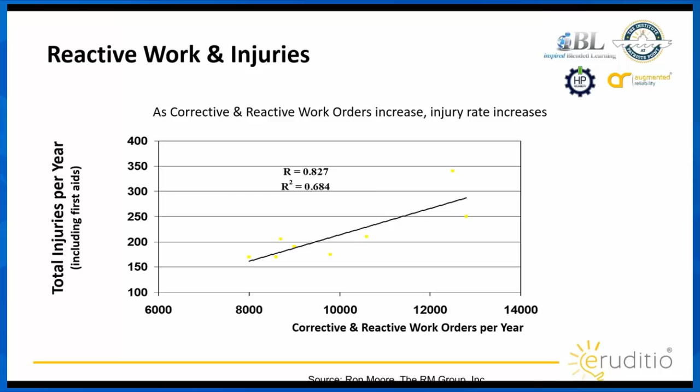Continuing on, what we know is that as we increase our PM and PDM work orders, our injury rate decreases, inversely related to the other one. As our PMs and PDM work is defined, we generally have very good job plans that call out specific risks and hazards, how we mitigate those, what permits we need, and reference lockout tagout procedures. So obviously the more proactive we are, the safer we're going to be. In order to be proactive, we have to be planning jobs, and planning them to the right level of detail.

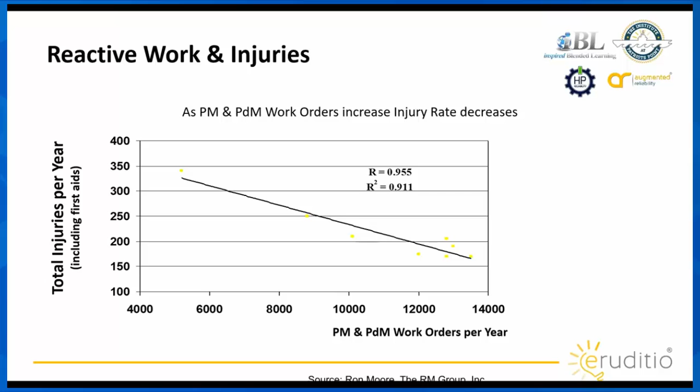Now I asked about reliability, what is reliability to you? You guys gave some good one-word definitions: consistency, quality, repeatability, teamwork, safety, all those great things.

But if you look it up, the definitions are: the quality of being trustworthy or performing consistently well, and the degree to which a result of a measurement, calculation, or specification can be depended on to be accurate. I really want you to think about that second definition. From a PM, corrective, or rebuild perspective, do your work orders and job plans allow your mechanics, electricians, or technicians to take a measurement repeatably and consistently, so that if mechanic 1 takes a measurement, and mechanic 2 takes that same measurement 5 minutes later, will they get the same results?

That's what we need from a PM perspective. We also need that same level of rigor in corrective and rebuild procedures. But how do we do that if we don't have good job plans? It's really going to be a struggle.

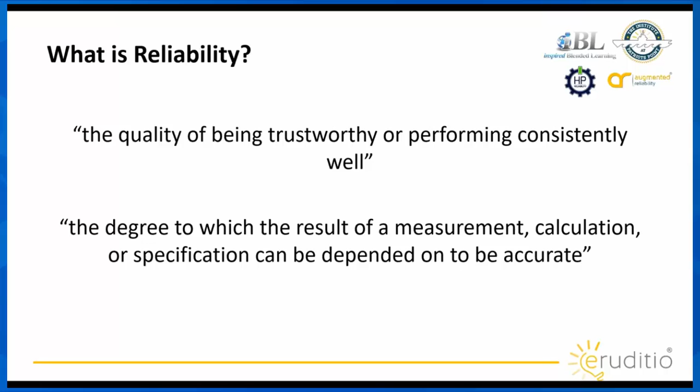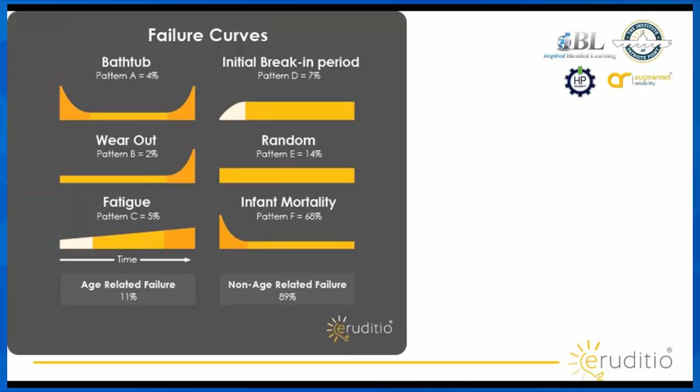Then we also have other issues with reliability. Most of you recognize these failure curves from the Nowlan and Heap study, taught in RCM and other learning activities. What it essentially shows is that most of our failures are not related to age, they're in fact related to infant mortality. Now what does this have to do with job plans? We know those causes of infant mortality come from a variety of places: design defects, manufacturing defects. Some of that's out of our control, we can't directly influence that when developing job plans.

But those next ones we can influence: installation defects. How many of you have defined specifications for installing equipment? When you're aligning rotating equipment, are you checking for soft foot first, then doing your alignment? Are you taking into account thermal growth? Oftentimes thermal growth isn't considered, and that's an installation defect, because as that equipment heats up, it's going to grow out of alignment tolerance, causing premature failures. What about commissioning?

Do we have a proper commissioning procedure built into our job plans, or a proper way to hand it over to operations or shut it down? Those types of things influence that as well.

We have improper routine maintenance. Once again, that's about consistency in performing an activity or taking a measurement. Lubrication, for example. How consistent are we at applying the right level of lubrication? Do we have the specifications so we know what lube levels we need to apply, or are we relying on pumping 3 shots of grease into that bearing? No, that's not very specific or consistent.

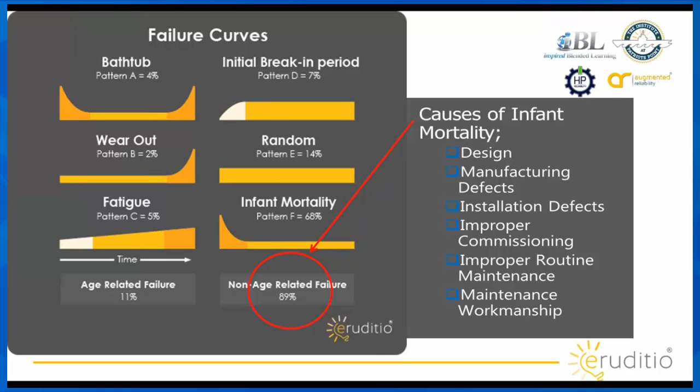And then we've got workmanship. I'm not saying that we don't have capable people. There are other pieces that come from workmanship, and we're going to talk about those next. We have human performance factors that influence us. There's a lot of issues potentially going on that cause some of those workmanship issues.

A lot of this can be addressed with good job plans. But first, before we dive into that, I want to make sure we understand what these types of errors are.

The first one is really an unintended mistake. What that means is slips can be thought of as actions not carrying out as intended or planned. A great example is when you fat finger something - you meant to type 9, but you typed 8 instead. That's a slip. Job plans can help minimize some of those.

Lapses - and I'm sure many of you have experienced some of these. How many of you have driven to work or driven home from work and not remembered that drive? That's because our mind works on autopilot sometimes, and lapses are those exact things. We skip certain steps, we miss certain actions because our mind is on autopilot. Job plans and a checklist combined with that can eliminate lapses as well.

Then we have an intended error, or a mistake. That is a misapplication of a good rule, or application of a bad rule. Once again, that's something we can help mitigate and manage through various techniques, but having good job plans will help minimize those as well. And then lastly, we have violations.

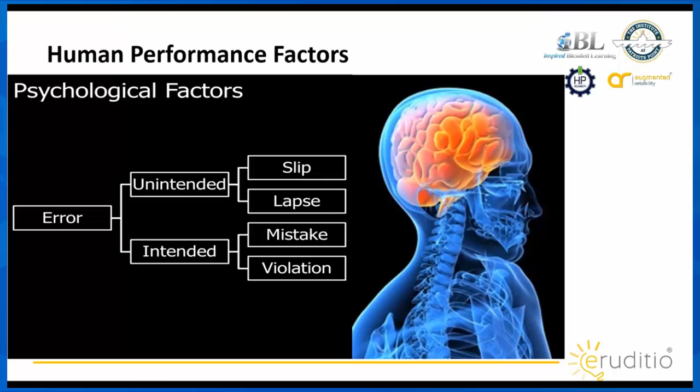If we go back to those failure curves, 68% infant mortality - we're leaving a lot on the table. Procedures and job plans are one of the ways to tackle those activities.

And how much does this give us? What's the benefit? If we have a written procedure available - a good, detailed, step-by-step job plan like we're going to learn about next - we'll get about a 5% error rate typically.

Now if we combine that with a paper checklist, we can get that down to about a 1% error rate. And if you use digital checklists built into the system that will not allow you to continue unless you do so, we can get that down even further.

But even having just a written procedure, a 5% error rate, is a dramatic reduction in infant mortality based on what I see personally in most organizations. Adding a paper checklist to that is hugely, hugely beneficial.

Now, those of you who haven't already - the Checklist Manifesto, it's a great book. I highly encourage you to grab that and read it. It talks about human error, the role of checklists in eliminating human error, and a variety of great things around that. It's actually changed some of the way I think about planning now. It's definitely worth picking up and going through.

So how do we actually develop these job plans? What can we do to develop good job plans that allow us consistency, repeatability in our work, and allow us to capture knowledge, and all those great things? Well, there's a way to do that, and it's called job mapping.

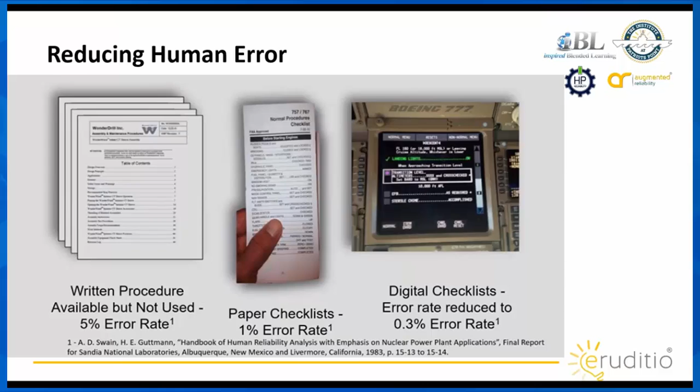The way job mapping works is we're going to break down not only projects but jobs into smaller and smaller buckets. So at the very beginning, let's talk about a project. We might have a winter shutdown or a summer shutdown, where we're going to do a bunch of maintenance work. Now within that project, we're going to have a whole bunch of different jobs.

We're doing this so we can bucket our work and dive deeper into the individual steps needed to perform that task. From there, we go down to the steps, and each one of those tasks is going to be broken down into 4 to 7 steps. Now if we start exceeding that, say 10, 20, 30 steps, we might need to look at breaking that up into a few more tasks as opposed to one larger task.

But these are the very specific activities that we're going to do. Set new pump. If we're removing the old pump, it might be attach rigging, then lifting, and so on and so forth. We're going to get very, very prescriptive in what we're doing here. Then we have one more step down, which is the instructions, and these are specific to each step, and we'll dive into these in a minute.

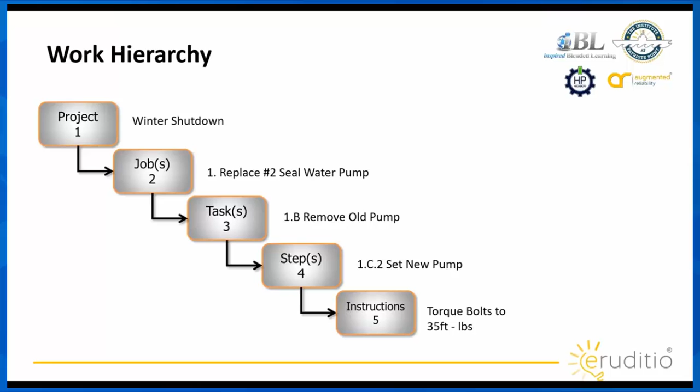One of the things we also have to be aware of as we start to map these out—we have our steps here: break coupling, rig to lift, pick up old pump, that sort of thing—is that there are certain things we need to be aware of and communicate out to our maintenance technicians, especially from a safety standpoint.

And those are warnings and cautions. Now I have to ask—I'm sure all of you are very diligent and have always read the manual that comes with your power tools. If you have, you'd know the difference between a warning and a caution. A warning is really related to personal injury: what can go wrong that can injure the user or someone in the area? Whereas a caution is more about damaging equipment.

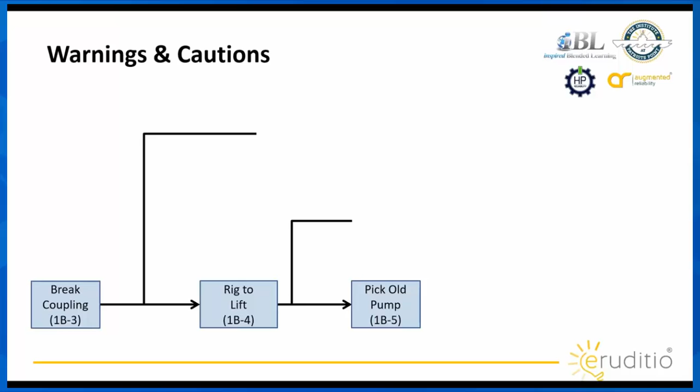So when we're building this job map, we need to create awareness around both warnings and cautions. What this may look like is we might put a caution before the step. You see, we're going to rig that equipment to lift, so we'll put a caution in there: next step contains rigging, failure to follow all company standards and rigging procedures could result in equipment damage.

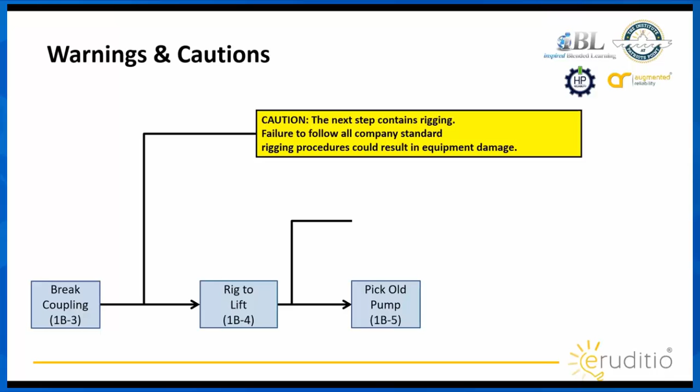Now, next step is pick up that pump. That's where we could have an injury. So before that, we're going to map that warning. The next step contains lifting. Failure to follow those lifting procedures could result in severe personnel injury.

We want to map the warnings and cautions before the step takes place. Reason we do that, we want to create awareness of those before the person executes that step. That's why we map them before. We also color code them. Cautions yellow, warnings red. Creates a visual reminder of, hey, there's a risk of injury here, or there's a risk of equipment damage. So we want to call these out. And these are part of the instructions for each and every step.

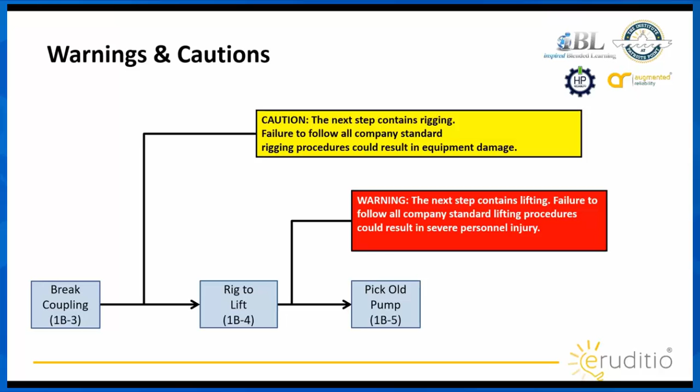Next, we're going to move on to constraints and resources. Now, constraints really is what is going to inhibit us from completing this step. Right? Now, this can go a variety of different ways. What's the weight of the pump? Where is the pump located? Do we have access issues? And so on and so forth. While resources are things that we need to do to overcome those constraints. So we always map constraints and impediments to the top of the step. Then we map resources to the bottom of the step.

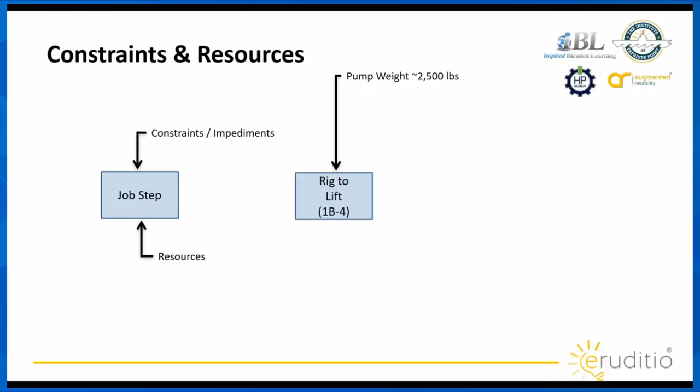So what does this actually look like for us? Well, rig to lift is our step. A constraint is the weight of that pump. It's 2,500 pounds. I definitely can't pick that up, and I'm sure many of you can't either. So what are the resources we need to overcome this? Well, we might need some cables, some clevises. We may need our rigging standard or procedure so we know how we should properly rig this or what the requirements are for us as an organization.

And then if we have to pick up this pump, what are the constraints? Well, it's 50 feet off the ground and it's 75 feet from the closest parking spot. That's a major challenge for us to overcome. So how are we going to do that? We need a 30-ton crane with 100 feet of stick, and we have a lifting procedure again. So here, what we're doing is we're really identifying what are all the issues that we're going to have to overcome while we're doing this work, and what are we going to do to overcome those. This allows the planner to really develop or define the tools, the parts, the equipment, the stuff we need to perform those tasks and steps.

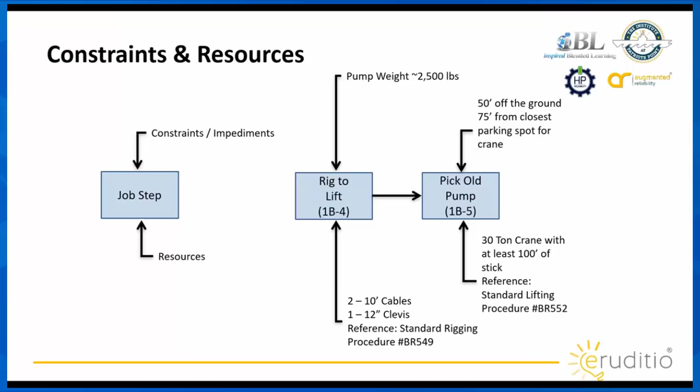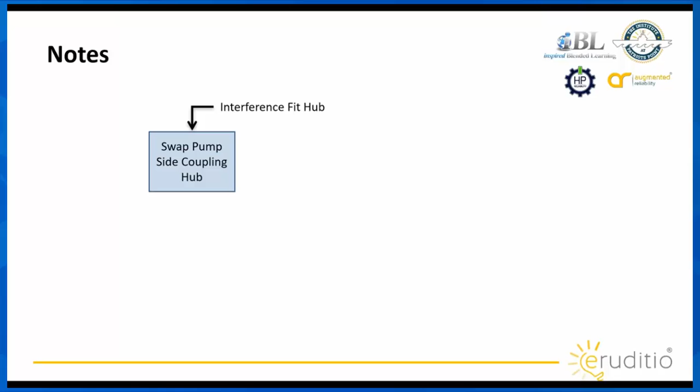Now from there, we get some other notes. All right, so here we got to swap the side coupling hub. It's an interference fit. That's good to know. That's going to dictate what tools we may need to provide our technicians with to go do this job. So in this example, we might need a hub puller. We might need a torch. We might reference some inspection procedures that we have. That way, everyone's doing it consistently.

Now, we may also have some other information we need to pass along. And if we really need someone to take a measurement, make a judgment step, we want to highlight that in gray underneath the step. In this example, if those hub teeth are excessively worn, then we want them to replace it, and we are going to provide that part number. Now, I wouldn't suggest we go ahead and kit that part, but we're going to put it as a reference because they may need it.

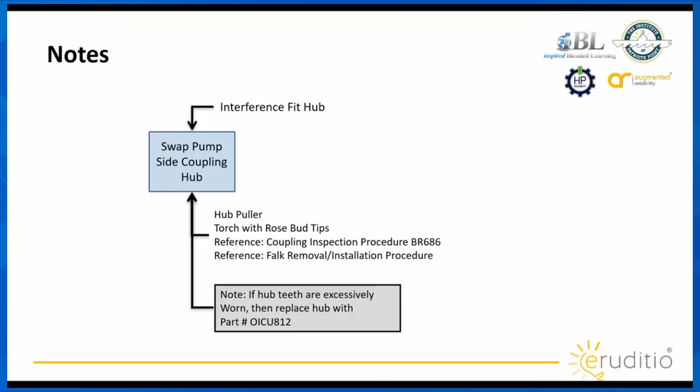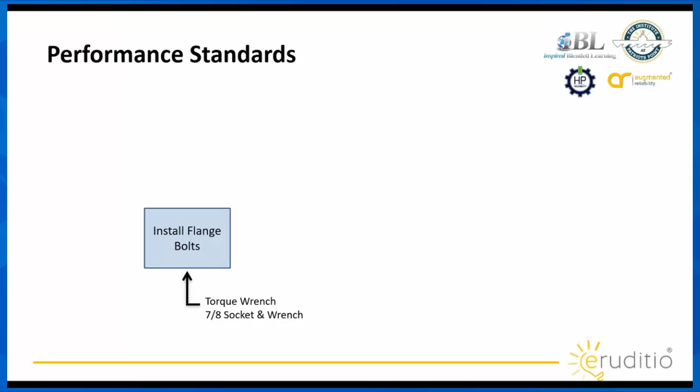We also have performance standards that we need to hit. Now, we talked about repeatability and taking measurement or consistency in the execution of work. Well, how do we get consistency if we don't have performance standards built into our job plans? All right. So that's something we definitely need to call out. So for this example, if we're going to install flange bolts, you see we got our resources there. We got a torque wrench, the socket size, that sort of thing. There's special instructions, so there's a special torque pattern that we need to follow, but then we also need our specifications there. All right. So that 85 foot-pounds.

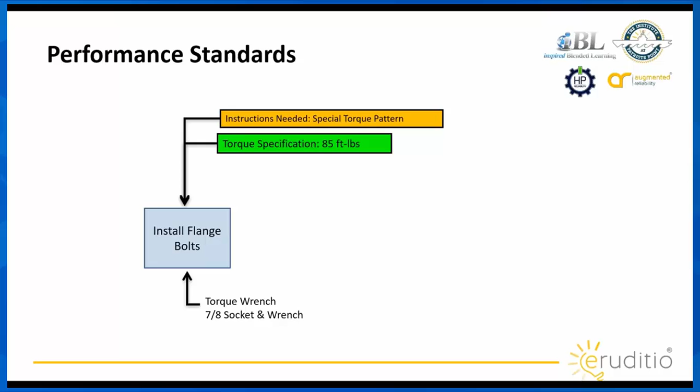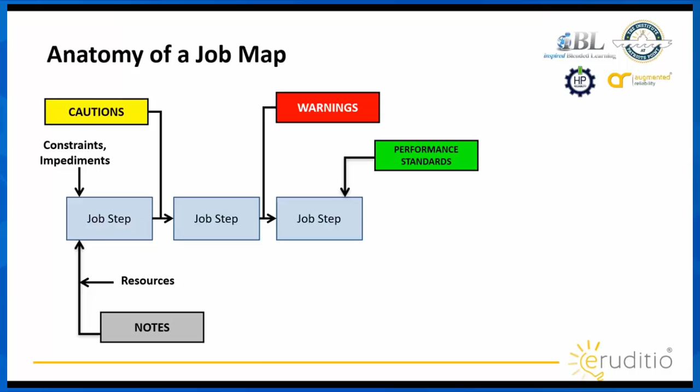Now I suggest we take specifications a little bit further using a 3T approach, and I'll talk about that in a moment. All right. But we need to call out the special instructions or specifications that we need to perform that task. Now, if we map all that out, this is what a job map may look like. We're going to have warnings, cautions, constraints and impediments, performance standards, notes, resources, and a variety of things. All right. This is going to get big, and this may get not so pretty. Here's an example of the larger activity for replacing that pump. All right. So this is what the maintenance planner is doing with sticky notes on a whiteboard or potentially a desk.

You don't have to make it look pretty like this on the screen. I created a nice pretty one here for an example. Usually this is sticky notes. You take a picture of it and you use that. This job mapping activity is really for the planner to organize and think through the job from beginning to end. It's really about making sure we don't leave any stones unturned.

We identify all the critical things to make sure this job is successful, not just from a safety standpoint, but also from a reliability standpoint. Now, some of you may be looking at this and you may be thinking, you know what, that's a lot of detail. I don't know if I need that level of detail in my job plans. You know, I hire experienced people, or I only hire journeymen. I don't need all that.

Well, I challenge you to go ask 3 or 4 or 5 of your journeymen on how to perform a task if you don't have procedures like this already. And I'm willing to bet you're going to get 3 or 4 different answers. They may be similar, but they're going to be different. And when they're different from a preventative or predictive standpoint, can we trust our reading to be consistent?

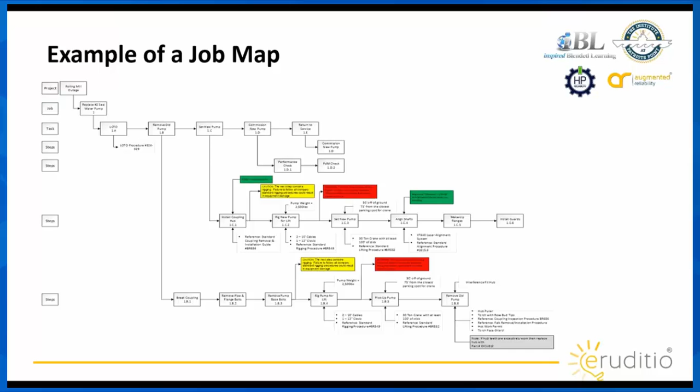From there, once we have this, we're going to convert that to the job plan. Now, how we do that is with something called Simplified Technical English. So Simplified Technical English is really a set of writing rules, and it actually came out of aviation. For those that are not that familiar with aviation, the international language of aviation is English, meaning every control tower around the globe should have some English-speaking people to be able to communicate with aircraft. Most manuals are all provided in English as well.

Well, some of the challenges with that is English isn't always everyone's first language. It might be their second or third. So Simplified Technical English is a way to communicate in a way that is understandable for everyone, even if English isn't their primary language. It also eliminates some issues with how we interpret things. So writing procedures is not a simple task. Many people have different opinions on the sequence, the specifications, etc. But we really need to rely on Simplified Technical English to help us.

If we like to write novels when two sentences will work, that's going to cause issues from a reliability standpoint. Maybe misinterpretation, miscommunication. We might be doing things ahead of where we should be. Think back to some of those psychological factors we discussed earlier. Good procedures help us eliminate some of those.

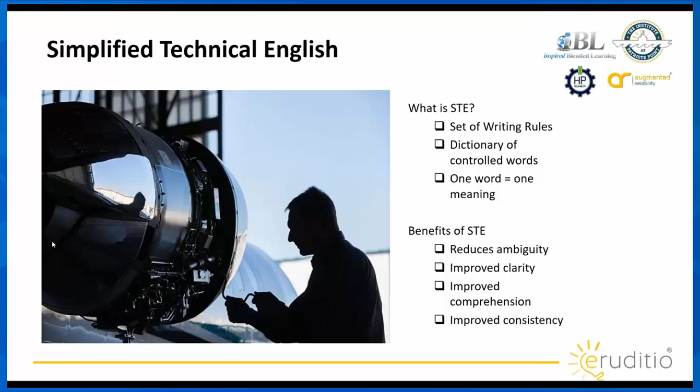So from a Simplified Technical English standpoint, we want to be very specific and we want to keep it simple. There's whole courses and plugins and stuff you can get for this. I advocate keeping it simple. We want to use very short sentences. I don't want any big run-on sentences or anything like that. If we're writing a paragraph, less than 6 sentences. No slang or jargon. So I was working with a mining client down in the southern US, and they had a lot of bucket conveyors. And every person you asked had a different name for those buckets.

I had buckets, diggers, dippers, bins, just to name a few. Everyone had their own slang for that particular part. We had to standardize that to buckets, both in the CMMS as well as the procedure, so everyone knew exactly what was meant. We want to be as specific as possible.

You always want to use a, an, or the where possible before a particular object. When you do sequential steps, you want to break them out on separate lines. I often see people put a colon or semicolon and do 1, then 2, then 3, all in one big run-on sentence. Break out sequential steps as separate sentences and lines. Make it easy to follow.

If you're going to do lists, put a dash or a bullet in there, but break them out that way.

Graphics are another area that's over and underused. I've seen organizations go to a completely visual work instruction. It can be helpful at times, but it can also hinder at times. And I've seen others that don't use any graphics. There's got to be a balance - use graphics when they provide clarity, maybe an exploded view, or if you have to take a measurement in a very specific spot where there's no consistent way to ensure someone understands through text. Put a picture in for that, absolutely. But I wouldn't advocate having a complete visual work instruction.

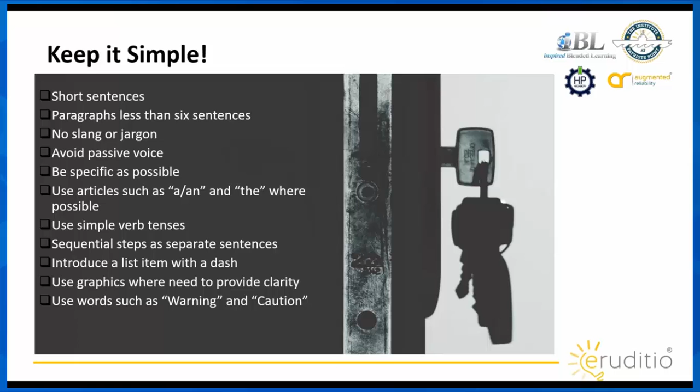Some other stuff - I mentioned the 3T methodology for identifying performance. To me, this is a very simple way to make sure everyone's hitting consistent measurements and performance requirements. So the 3T methodology: the first is target. What is the target they're expected to achieve for that work? In this example, our target is 85 foot-pounds.

Then we're going to provide that tolerance - plus or minus 10%, or plus 10% minus 0%, whatever that tolerance is, we want to specify that out. I like to go one extra step and not just say plus or minus, but also give them the range that is acceptable for whatever value they're measuring. This eliminates that one other possible error or mistake that can come from misplacing a decimal or converting units or whatever may take place.

Then we have the test, and this is really verifying the as-left condition. So in this example, what I may do is take a torque wrench, set it, see where it lands, and figure out what the actual torque is on that value.

If we're doing alignment, that target may change from shaft to shaft depending on what the rotating speed is. If it's 1800 or 3600 RPM, we're going to have different tolerances. So we need to make sure it's specific to that particular application. Once again, we'll put those different tolerances in there, and then we'll have them record as a way to validate that we are in fact in spec.

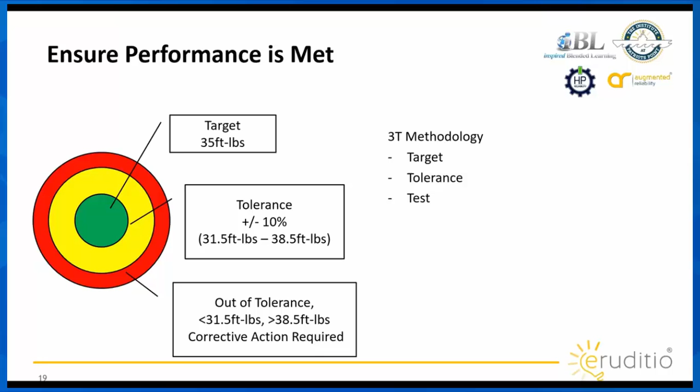Now, one of the major advantages to this approach - actually there's a few.

We often get asked how we get good time estimates for our jobs. When you break jobs down to the individual steps like this, it's very easy to come up with accurate time estimates. Instead of taking a swag at it, by breaking it down step by step, you get a very good idea of what time it will take to do this job.

The other major advantage to this approach, where we take the time to build those job maps and convert it to a job plan, is that even if it's a job we've never done or are unfamiliar with, breaking it down in that logical way lets us think through most of the things that are going to come up, like what tools, parts, and equipment we're going to need. Often, if it's a larger, complex job, it may not just be the planner doing this. It may be the planner and two or three very experienced maintenance technicians building this job map together, and then the planner converts it to the job plan.

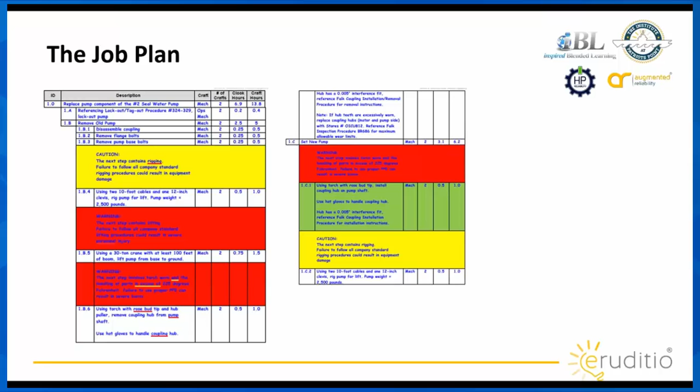Excellent. So it takes a lot to get to this level. So how do we go ahead and make that change? How do we transition to that level of detail in our job plans? Now, I am not advocating you start planning every single job to that level at this point. I don't think it's going to work. I'm a big proponent of picking two jobs a week and planning them to that level of detail. That's it - pick two, break them down to that level, get that level of information in there.

The ones you pick, I think, are very important. If you only have time to do one or two a week, that's fine - pick ones you're going to be able to leverage that success from. I want to see PMs that we're doing on a weekly basis; those are good candidates for this job mapping activity right off the bat. Complex rebuilds - when we rebuild something and know it fails 10 or 20% of the time afterward - are good candidates too. Corrective jobs or rebuilds we do quite often are another good candidate. Or if you have a specific model of pump spread all across your facility, working on that pump is probably a good idea, because once you develop it for one, you develop it for the rest of the facility.

That's the big thing here: if we take the time to develop these job plans and write them down to that level of detail, we want to make sure we're going to get value for it. So pick ones we're doing often, that result in a lot of downtime, that are complex, and that people confuse or mess up - we really want to focus on those. Now, I'm saying one or two a week as a good starting point.